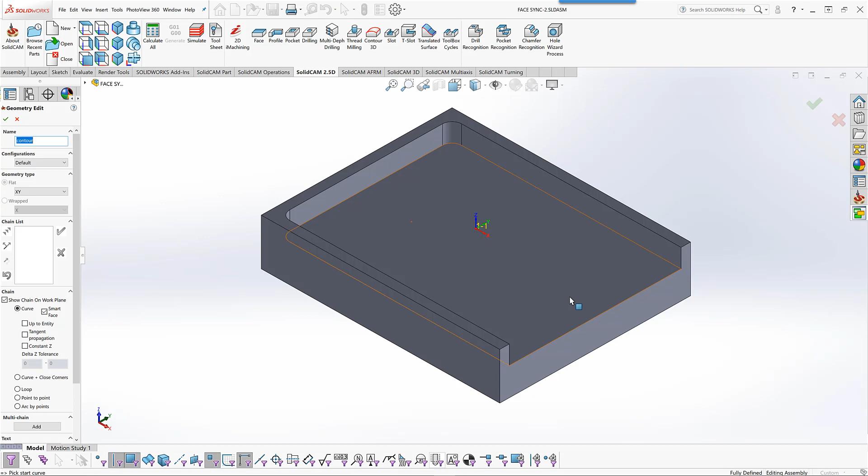We have now improved the synchronization of chain geometries when using the option of Smart Face to create the chain geometry. Let's, for example, take this pocket operation and we'll create a geometry using this face over here using Smart Face. We'll accept that.

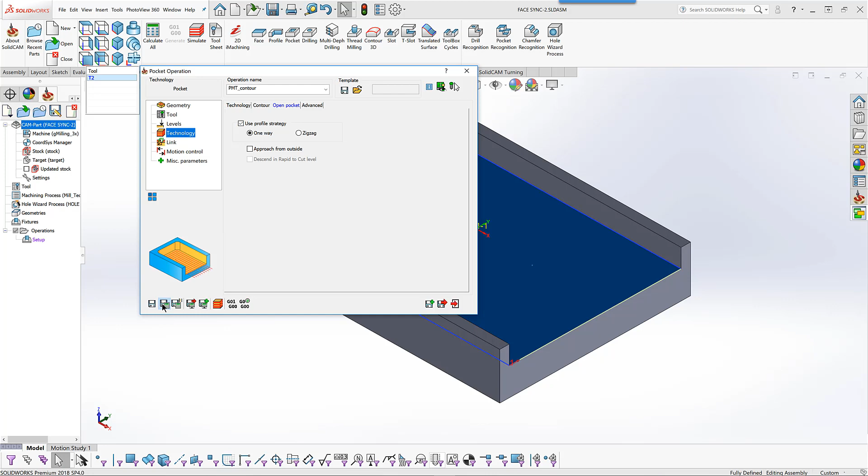We'll add our tool, a 10mm end mill, and in our levels we'll just have it go down to the depth that we want to go down to this floor over here, and we'll do this at one step. And the way I like working in many cases is with open pocket, use profile strategy. We'll just accept that, save and calculate, and you can see the actual tool pass that we have over here,

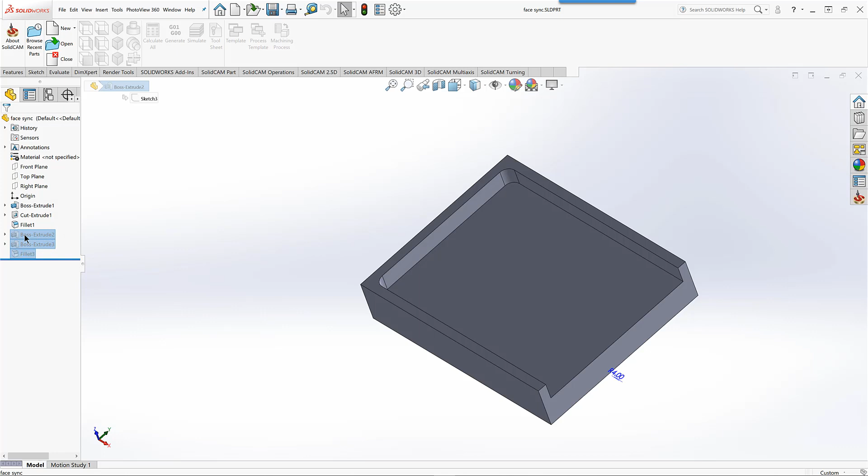covering the entire surface. What I'm going to do now is close this part and then go back to the original part that I've built. Now what I'm going to do is take these features that were suppressed on my part and unsuppress them. And as you can see, by doing that, I've added a boss to this face over here, as well as extra elements to this outside area over here.

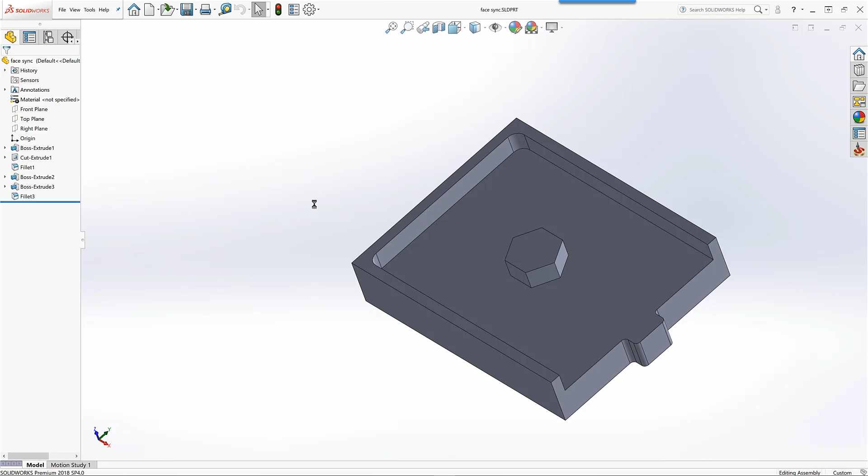We'll just save that. And now we'll reopen the part that we were just working on before. When I reopen the part, as usual, it will ask me if I want to replace the model with the new one. I'll click on yes. You can see the part has changed and it is now showing that it needs to be synchronized.

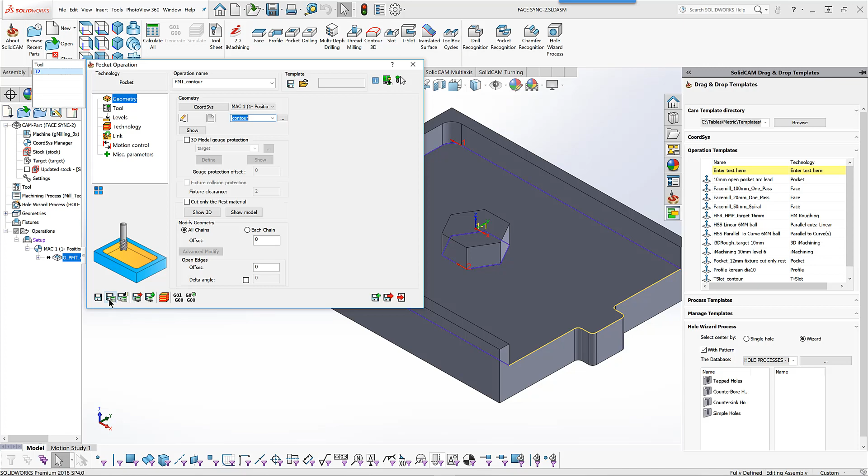I'll right click over here, synchronize my part, and if I take a look now at the actual operation, you'll see that we have now the new geometry automatically picked up because the Smart Face was tagged now as geometry, so it noticed the change on the face itself. I'll do save and calculate, and you can see the new tool pass as well.